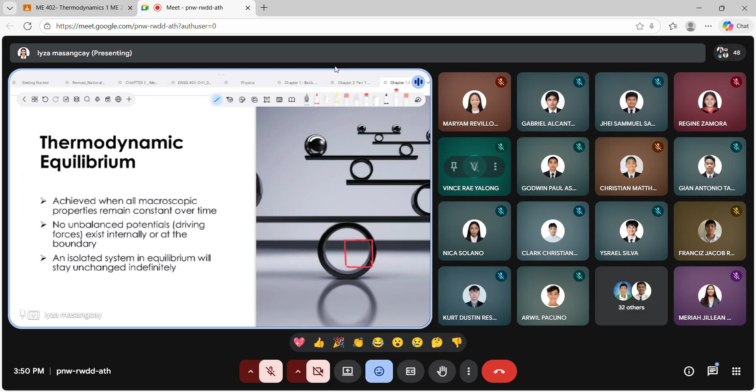Doing work or mass transfer. So kung wala tayong iibo doon, it will stay in equilibrium. So meron tayong three types when it comes to your equilibrium.

So the first one is mechanical equilibrium. So no net force imbalance, all the forces are balanced, so nothing moves. So that means if yung ating forces is acting downward, merong nagko-contradict to its force. So meaning, all of our forces are equal to zero when it comes to mechanical equilibrium.

Ano naman po yung thermal equilibrium? So it is uniform temperature, so no heat flows between yung ating parts of the system or between the system and the surrounding. No heat flows, that means no heat transfer, since both your system and your surrounding have the same temperature.

Next one is chemical equilibrium. So, no net chemical reactions or diffusion. That means yung ating concentration of substances remain constant. Example natin is when we mix two chemicals, once na natapos na yung kanyang chemical reaction, it is in chemical equilibrium, meaning hindi siya magbabago unless may gumalaw sa kanya or may madagdag sa kanyang chemical.

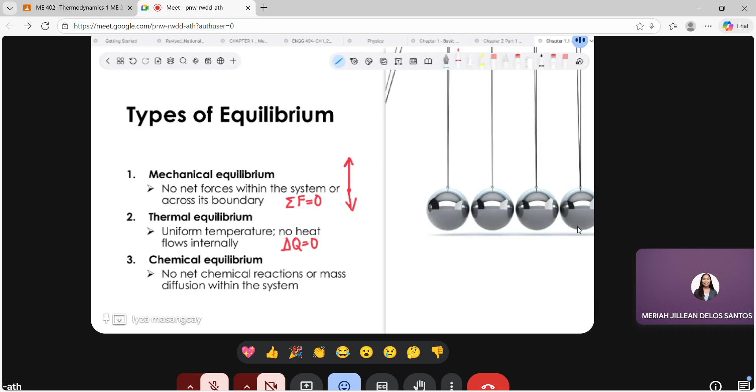Next one is process and cycles. So, in thermodynamics, yung process natin is any transformation that takes yung system from one state to another. While your cycle is if we have different states, once na bumalik yung ating state to its original state, that is what we call cycle.

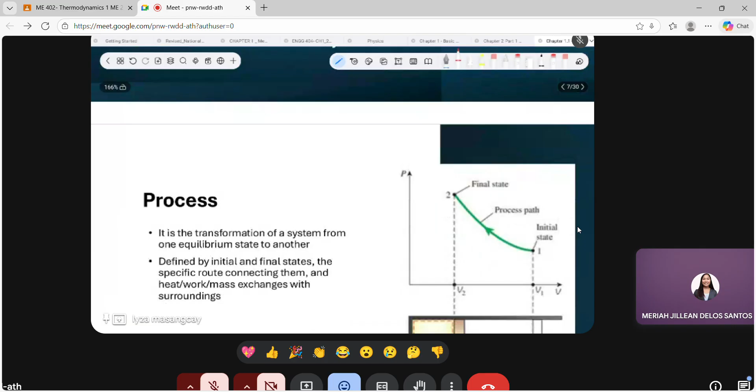So, as stated here, yung process natin is the transformation of a system from one equilibrium to another. So, for example, if you slowly heat yung ating gas at a constant pressure, yung ating state is magbabago from one state to another kasi umaangat yung ating temperature. So, from state point 1 to state point 2, meron tayong process na ginawa which is adding heat at a constant pressure.

So, it is also defined by initial and final states, the specific route connecting them, and heat, work, mass exchanges with your surroundings. So, for this example, we have state point 1, in this case defined by your volume. Once na nag-change yung kanyang volume, nag-compress, so from one state to another, nagkaroon siya ng process which is compression. Kaya nagbago yung ating state.

So if our state changes, from initial nagkaroon tayo ng final state, we have a process. Okay po? So the path na tinake niya, the exact way you get there, such as your constant pressure, constant volume na mga process, yun yung ating path.

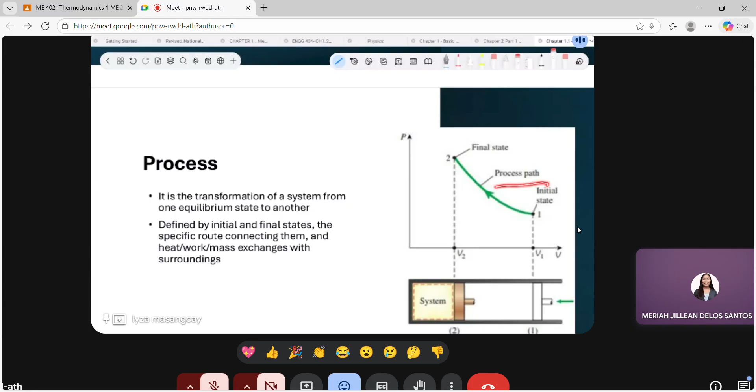Ano naman yung ating path dependence? So, path dependence of heat and work. Heat and work vary with the chosen path even between the same endpoints. So, they depend on how yung process natin is carried out. So, even if the start and end ng ating state are the same, taking different paths, your Q and work changes.

So, on a PV diagram, your quasi-static, which means yung slow process natin, work is formulated as the integral of your pressure dV. So when we say integral, we are finding the area under the curve, which visualizes the work for polytropic, isothermal, or arbitrary paths.

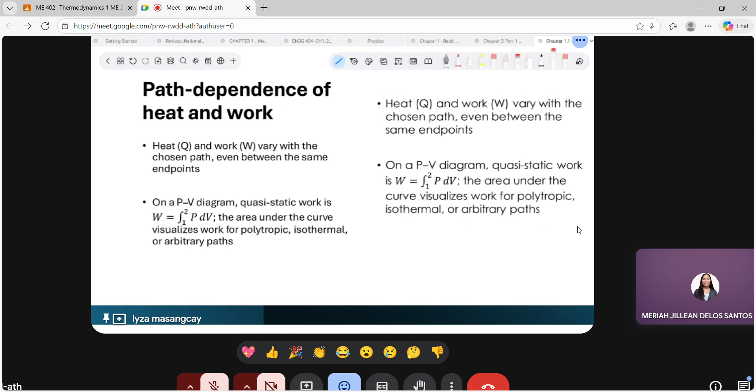So let's differentiate yung ating dalawang function, which is yung state function natin and path function. When we say state function, like your internal energy, enthalpy, and entropy, it depends only on the state of the system. So if we have yung state natin, meron tayong sarili-sariling internal energy, enthalpy. They are fully determined by the current values of the equilibrium properties.

While your path function, which is yung ating heat and work, depend on the particular process path between yung ating states. You must, syempre, know the path to determine yung ating heat and yung ating work.

So, now, let's discuss naman about our steady flow process. So, what is steady flow process? This is when the fluid enters and leaves a control volume continuously, and at any fixed location in the system, the fluid properties remain constant over time. In other words, yung condition at a point in your system do not change even though your fluid is moving through it steadily.

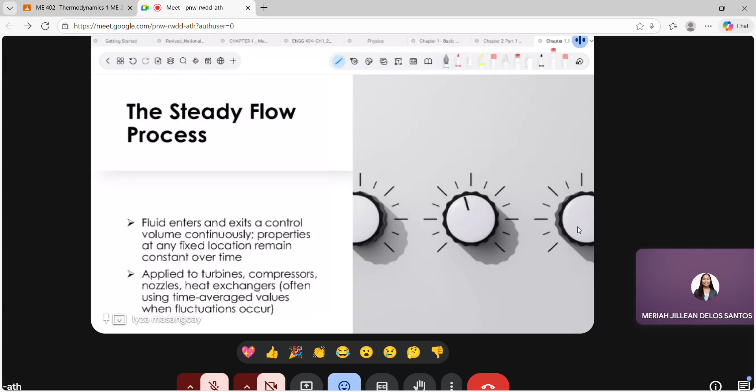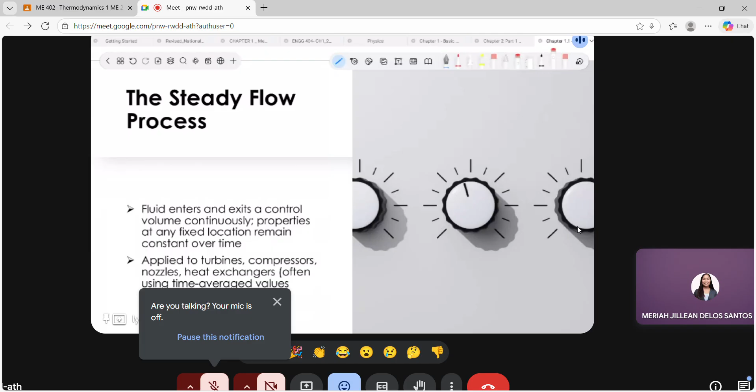So, ano example natin of steady flow devices or steady flow process? Those are your turbines, compressors, nozzles, and heat exchangers. For instance, when steam is flowing through your turbine, the pressure and temperature stay essentially the same over time even though nagpo-flow yung ating steam sa ating turbine. So we often apply the steady flow energy equation on these devices or on this system.

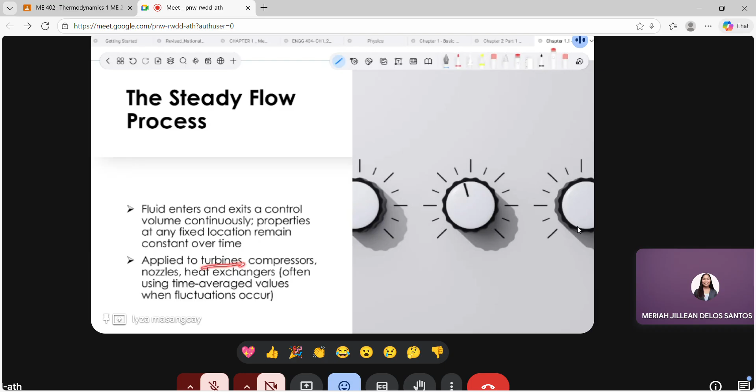So this image is an example of your steady flow process. So imagine meron tayong napasok dito and nag-out na mass. So for our example kanina, that is your steam. So even naglagay tayo dito ng steady flow ng steam, so kahit siya ay matagal na nating nagfo-flow, they have the same

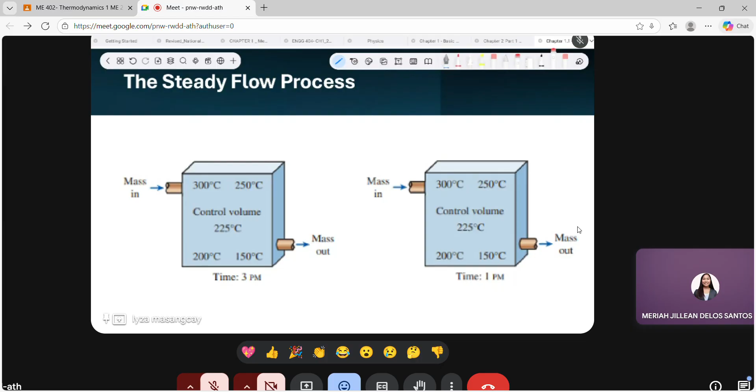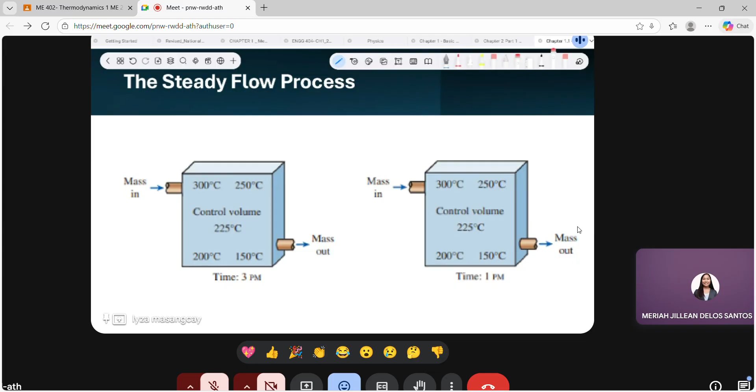So even, ano nga po, nasa na tayo? Na-interrupt kasi ako. So, even nagpo-flow siya, over time, they have the same property, which is in this case is your temperature.

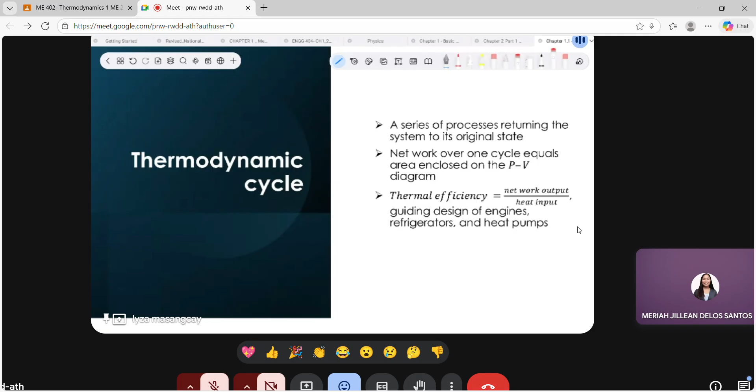So, continue natin about our thermodynamic cycle. So, it is a series of processes returning the system to its original state. So, example, this is our PV diagram. So, for example, we have this state point number 1. And then, nagkaroon tayo ng heat addition process. So, tumaas siya. So, this is 2.

Then, nagkaroon tayo ng constant volume process. So, this is state point number 3. Then, dumaan siya sa turbine. And then, bumalik siya sa ating first state. As said in your statement here, a series of processes returning to its original state. So, once na bumalik yung ating system to our first state, that is a cycle.

So, yung ating net work over one cycle is equal to the area enclosed on the PV diagram. So, as stated, yung area enclosed by your cycle is what we call your net work output. So, your thermal efficiency of a cycle is defined as the net work output over your heat input. So it tells us the fraction of your heat energy converting to your work, guiding designs of engines, refrigerators, and heat pumps.

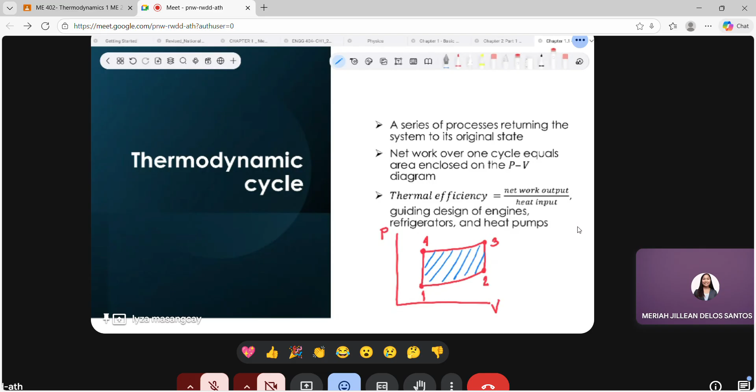So let's talk about naman your temperature and zeroth law. So why is it important to know your temperature and your zeroth law or your thermal equilibrium? So temperature is a fundamental property that quantifies the average kinetic energy of particles in a substance. So the temperature indicates how hot or how cold a system is. So cold is the absence of heat. So it also determines the direction of your heat transfer.

As we all know, yung ating heat transfer flows from higher temperature to your lower temperature. So for example, nag-iwan tayo ng ice sa ating table. We know that our surrounding is warmer than your ice. So the heat from the surrounding flows through your ice, making your ice melt. And then temperature enters many thermodynamic formulas, like your ideal gas law, and your definition ng ating entropy and phase change.

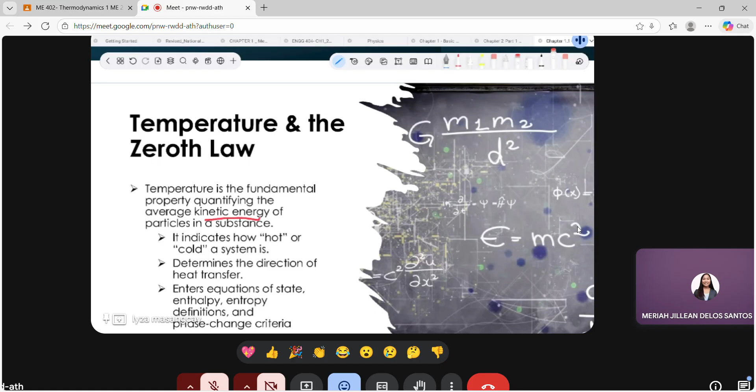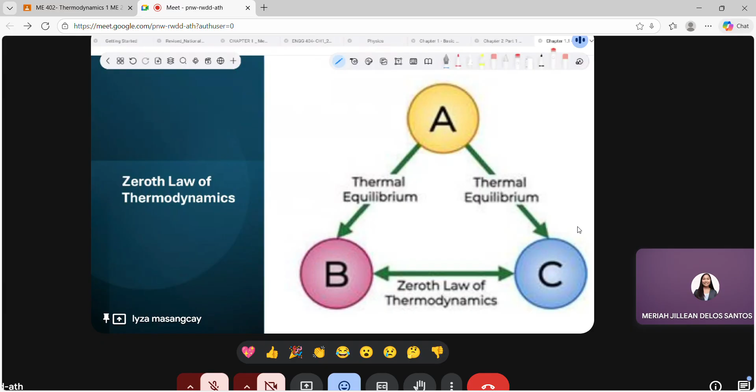Next one is our zeroth law. So what is zeroth law? As you can see, if your system A or your object here, A, is in equilibrium with your system C, and then your system B is in thermal equilibrium with your system C, then we can conclude that your system A and system B are in thermal equilibrium also. So that is your zeroth law concept of thermodynamics.

So if a system A is in thermal equilibrium with system C and B is also in equilibrium with C, then A and B are in equilibrium with each other. It establishes a transitive relationship for your thermal equilibrium. So, bakit ito importante? So, we can compare temperature in practice. For example, if a thermometer reads the same when placed in contact with your object A and then object B, then A and B are at the same temperature.

So in this case, even if they never touch or hindi sila nagdikit with each other, this is the foundation for using yung ating third party. So meaning magta-trust tayo with our thermometer that yung reading natin is correct.

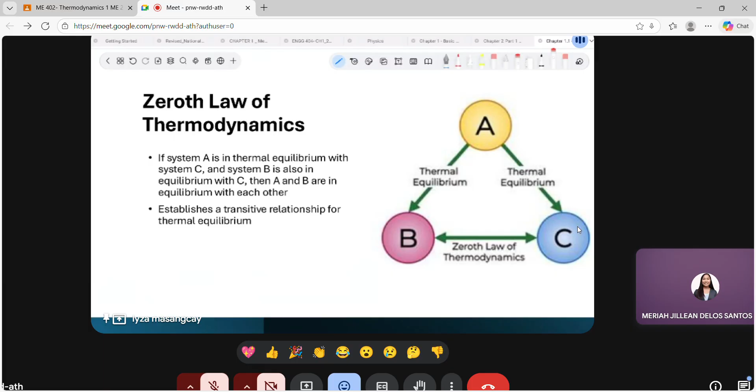Mostly, when it comes to temperature, the unit we use is degree Celsius. And for the US application, it is Fahrenheit.

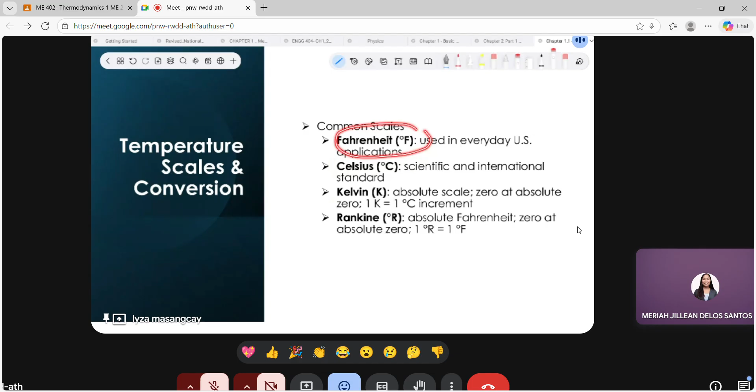So how about on your thermodynamic calculation or in your problem? We must know that we need an absolute scale for both of them, since when we are calculating, what we need to put in for thermodynamics is in absolute scale. So what is the absolute scale of Celsius? That is your Kelvin. What about the absolute scale of Fahrenheit? That is your degree Rankine. So how do we convert those units?

From Celsius to Kelvin, we add 273 to your degree Celsius to convert it into Kelvin. And from Fahrenheit to Rankine, you need to add 460 to your degree Fahrenheit to become your Rankine. From Celsius or SI to Fahrenheit, which is English units, it is 1.8 times your degree Celsius plus 32, which gives your degree Fahrenheit.

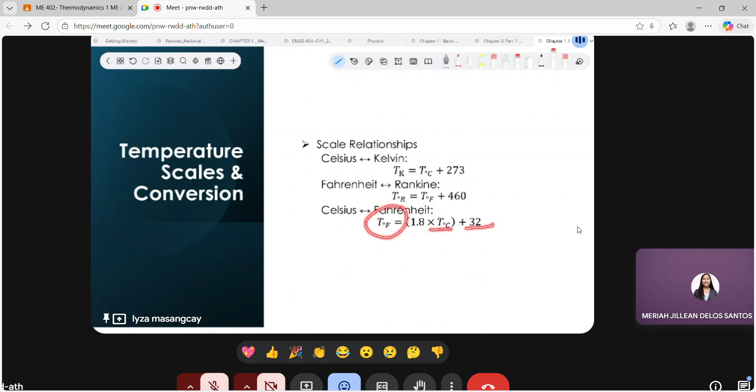So what is pressure? Let's discuss pressure. Pressure is a measure of force per unit area. It quantifies the normal force exerted by a fluid per unit area. So we can say that P is equal to the force exerted over the area, or per unit area. It governs fluid statics and flow behavior and is central to all thermodynamic analysis involving fluids.

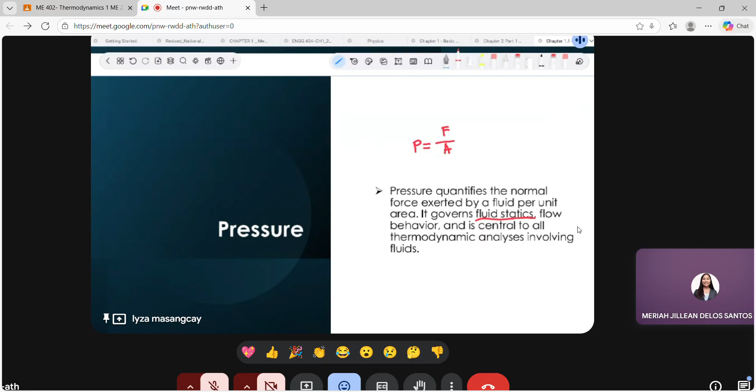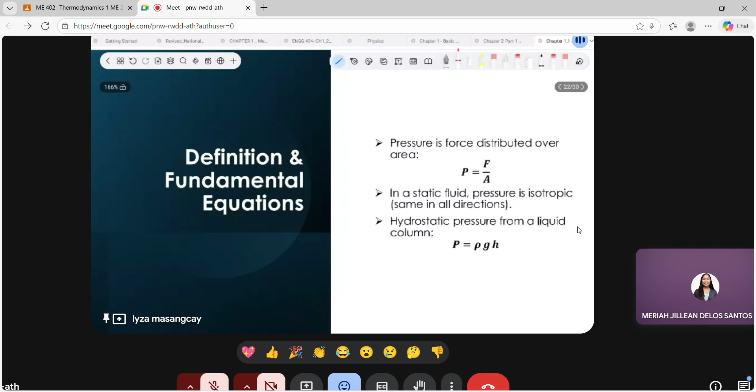So next, pressure is force distributed over area. In a static fluid, pressure is isotropic, meaning your pressure is the same in all directions.

As I said earlier, your hydrostatic pressure comes from a liquid column. This means as we go deeper, which is our height, the pressure also increases as we go deeper. That is our height.

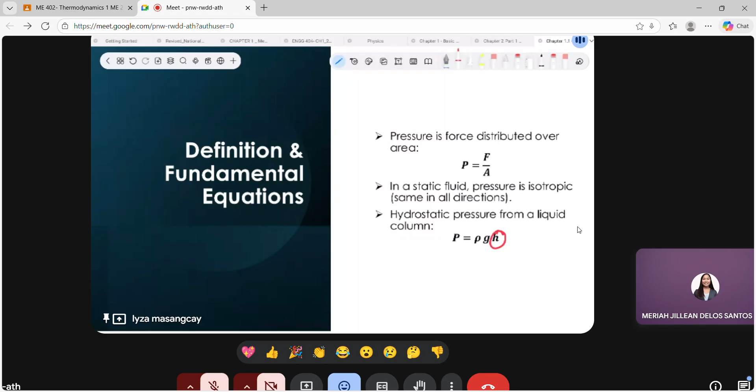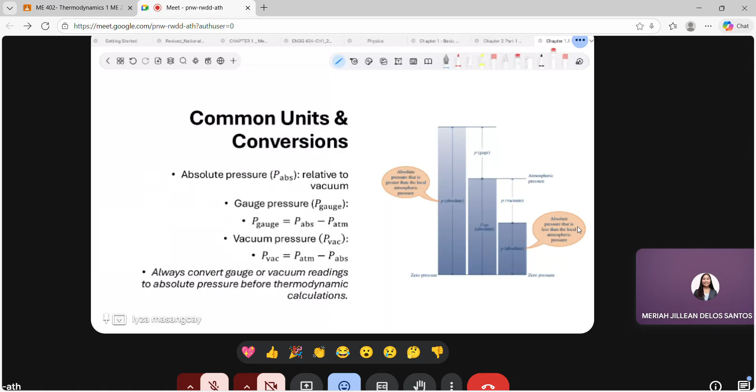Next is your vacuum pressure. Vacuum pressure is sometimes given when pressure is below atmospheric pressure. With that definition, your vacuum pressure equals your atmospheric pressure, since it is below atmospheric, minus your absolute pressure. Take note that you need to always convert your gauge and vacuum pressure readings to absolute pressure before thermodynamic calculations, because most of our thermodynamic formulas require absolute pressure.

So for your sample problem: the absolute pressure of a vacuum chamber. A vacuum gauge connected to a chamber reads 5.8 at a location where atmospheric pressure is 14.5 psi. Determine the absolute pressure in the chamber. So what are the given values here?

We have your vacuum gauge, so let's write it down. Given: vacuum gauge, which is 5.8 psi, and your atmospheric pressure is 14.5 psi. So determine the absolute pressure.

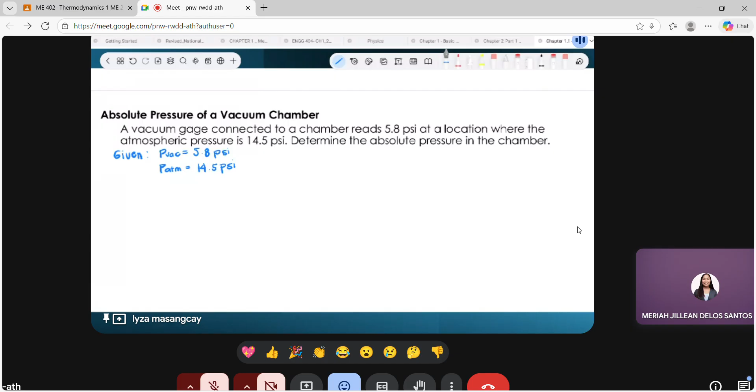Your vacuum pressure equals atmospheric pressure minus your absolute pressure. So your absolute pressure equals atmospheric pressure minus your vacuum pressure. Substituting the given values into the formula: that is 14.5 psi minus 5.8 psi. So what is your absolute pressure? What is 14.5 minus 5.8? That is 8.7 psi.

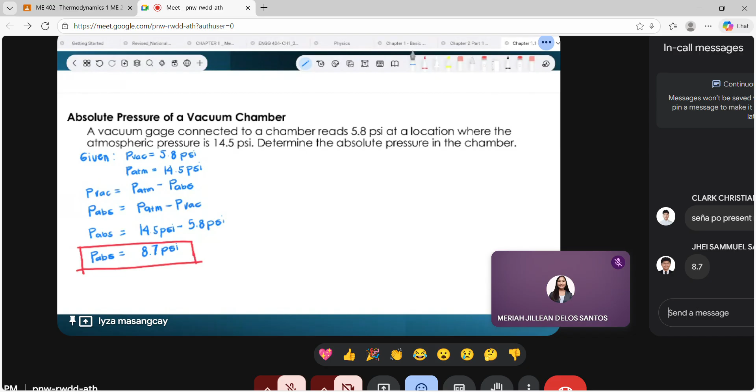Next natin is your pressure measurement devices. So what are those pressure measurement devices?

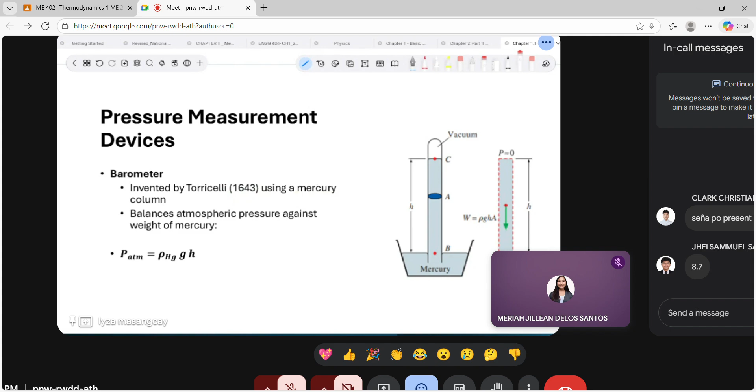So we have here your barometer, which measures yung ating atmospheric pressure using a liquid column. In this case, it is invented by Torricelli in 1643. So a barometer is a liquid column. Ang ginamit ni Torricelli is mercury. It balances atmospheric pressure against the weight of the mercury.

So kanina, ano yung formula for our hydrostatic pressure? That is P is equals to your density times gravity times height. For this case, siya ay density of mercury, since the liquid used is mercury, times your gravity and then yung height ng ating mercury sa ating liquid column.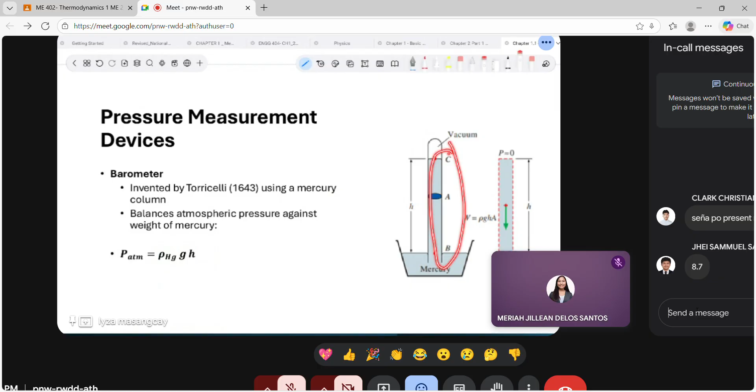So let's have an example for your barometer problem. Determine daw po the atmospheric pressure at a location where your barometric reading is 740 millimeter in mercury. And the gravitational acceleration is G is equals to 9.805 meter per second squared. And then assume the temperature of mercury to be 10 degrees Celsius, so which its density is 13,570 kilogram per cubic meter.

So for this problem, ano yung mga given natin? Given is your density of your fluid, which is mercury. So this is 13,570 kilogram per cubic meter.

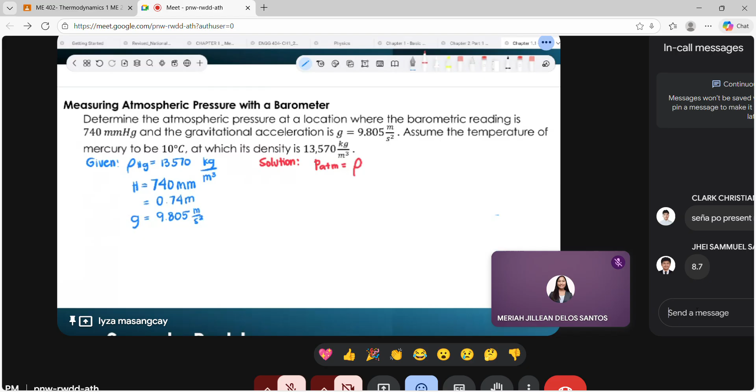So yung solution natin for this one, we have here your atmospheric pressure is equals to the density of your fluid, which is mercury, times gravity times your height na ating reading. So we have 13,570 kilogram per cubic meter times your gravity, which is 9.805 meter per second squared, times your height, which is 0.74 meter.

So in this case, we can cancel yung ating meter dito, so this is squared na lang. So ano yung mga unit na matitira natin? We have your kilogram times your meter over square meter times your second squared. And then your kilogram meter per second squared is equals to your Newton. So this is Newton per square meter, which is Pascal.

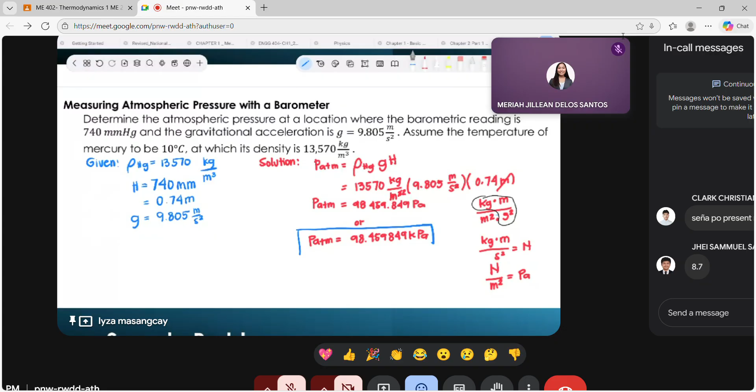The next natin is another pressure measurement device, which is manometer. So a manometer is a U-shaped tube used for pressure difference. One common setup nito is your one arm has a liquid or connected to your liquid. So it is connected to a system. In this case, we have here your gas tank. And then yung another end is open to your atmosphere.

So the fluid, it's either mercury, water, or oil in the U-shaped tube will settle so that the pressure at the bottom of both arms, so your pressure on our first arm, and then your pressure here, is equals po. So the hydrostatic relation natin in one leg, we have here your P is equals to P0 plus your density times gravity times your height.

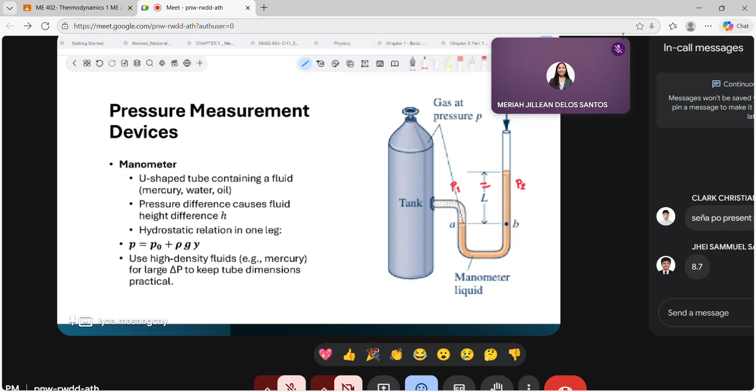So we must use daw po high density fluid, so it can be mercury for large difference ng ating pressure to keep your tube dimension practical. Since pag yung density natin is mababa, yung pressure difference nga or yung kanyang magiging reading dito, yung kanyang L is masyadong malaki. So hindi na siya economically pwede or hindi na siya possible magawa yung ating manometer.

So we have here your sample problem na hindi nabura yung kaputol. So we have here your sample problem which is for manometer, so your U shape daw po. Consider a U tube whose arms are open to the atmosphere.

So now water is poured into one arm of the U tube and light oil, where your density is 5,790 kilogram per cubic meter, into the other arm. One arm contains 70 centimeter high water, while the other arm contains both fluids with an oil to water height ratio of 4. Determine the height of each fluid in that arm.

So what is our given? Let's list all the given values from this problem. So we have here our given.

The density of our oil is 5,790 kilogram per cubic meter. And then the density of our water, which is not given, but we should know its constant value, which is 1,000 kilogram per cubic meter.

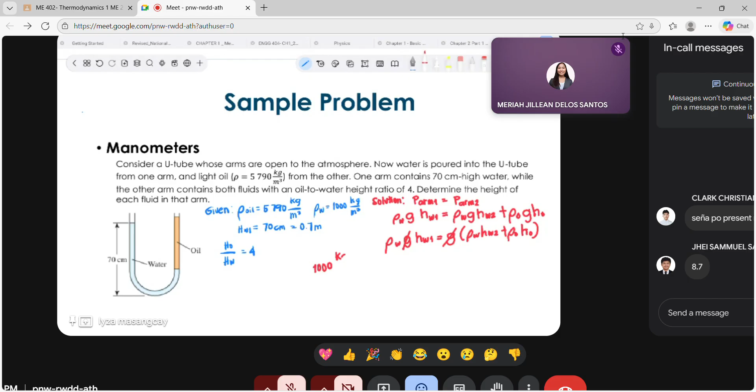So what is the density of our water? That is 1,000 kilogram per cubic meter times the height of our water for the first arm, which is 0.7 meter.

And then the density of our water times the height of our water, which is HW2, plus the density of our oil, which is 5,790 kilogram per cubic meter.

Since we have given here an oil to water ratio, we can use that so HO is equal to 4HW2. If we multiply both sides by HW2, we get HO is equal to 4HW2. So substituting the value of 4HW2 for HO, we multiply this by the density of our oil.

So simplifying our equation, we can have 700 kilogram per square meter is equal to 24... this is 1,000 kilogram per... plus.

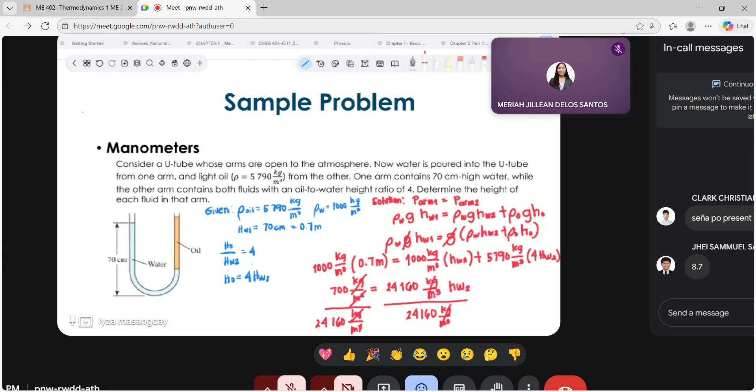So HW2 is equal to how much? 0.02897. So this is 0.02897 meters. In this case, we can substitute our HW2, the height of water on arm 2, into this equation.

So that is HO is equal to 4HW2. 4 times our HW2, 0.02...